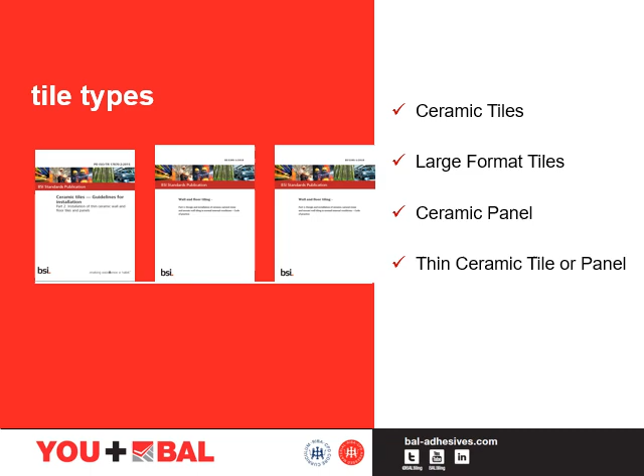The definition of tile types in terms of their dimensions as described on this slide can be found in the British standards. The British Standard 5385 Part 1 2018 Wall and Floor Tiling deals with the design and installation of ceramic, natural stone and mosaic wall tiling in normal internal conditions. Then there's BS 5385 Part 3 2014 Wall and Floor Tiling, which deals with the design and installation of internal and external ceramic and mosaic floor tiling in normal conditions.

In the case of international standards, 2015 saw the introduction of 2 new technical reports. For the installation of large format tiles, we have PD ISO TR 17870-1, and for the installation of thin ceramic wall and floor tiles and panels, we have PD ISO-TR 17870-2.

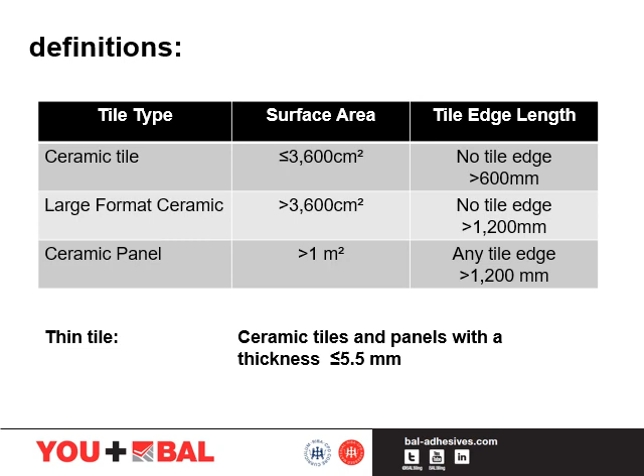The next set of slides looks at some important design considerations when installing larger format tiles and panels on internal and external walls. We will now look at some important background characteristics which should be considered prior to selecting larger format tiles, ceramic panels and thin panels as a suitable wall and floor finish.

We should also select suitable time schedules and procedures to allow those background materials to cure sufficiently so that the majority of shrinkage would have occurred prior to the installation of ceramic tiles or panels. The effect of long-term shrinkage on thin or large format ceramic panels could be a lot more severe than for smaller format ceramic tiles.

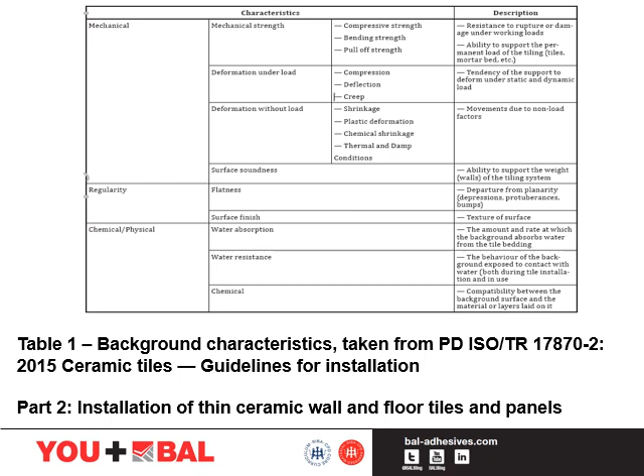However, due to permissible manufacturing tolerances, the large format tiles and panels could have surface flatness irregularities of their own. This makes it difficult for the installer to create a flat tiled finish, and therefore the background may need to be constructed to tighter tolerances to allow for the irregularities in the tile panels themselves.

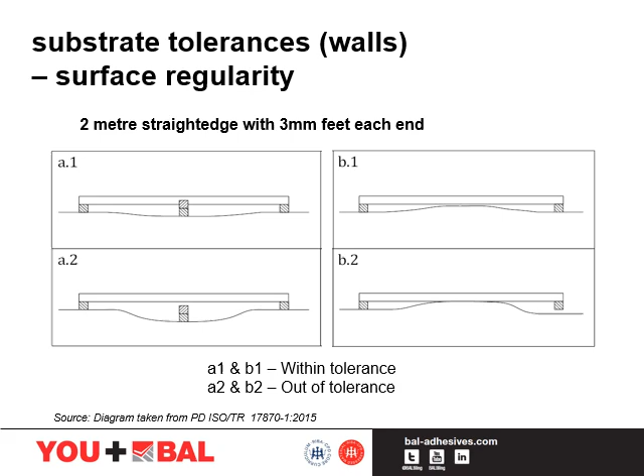As with wall tiling, the British standard for surface regularity on floors is also 3 mm or SR1. Where tiles are bedded in adhesive, the floor should conform to SR1. If the surface regularity of the subfloor is inadequate, it should be corrected prior to tiling work commencing, i.e. we should be using a smoothing compound to create a flat surface to tile to.

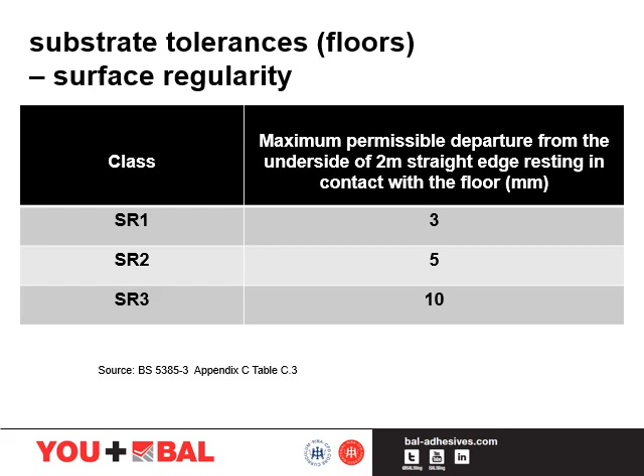Now, the same goes with wall tiling as floor tiling. If we have a large format panel or tile, there may be surface irregularities within the tile itself, so a greater degree of accuracy in the substrate is needed to create a flat finish in the tiles without lipping at the tile joints. Important factors to consider would be the weight of the tile versus the background.

A 10 mm thick natural stone is equivalent to 30 kilos per square metre. A 9 mm thick porcelain tile is equivalent to approximately 18 kilos per square metre. The weight of the adhesive and grout is also estimated at 4 to 5 kilos per square metre for a 3 mm solid bed, and that must be included in the total weight.

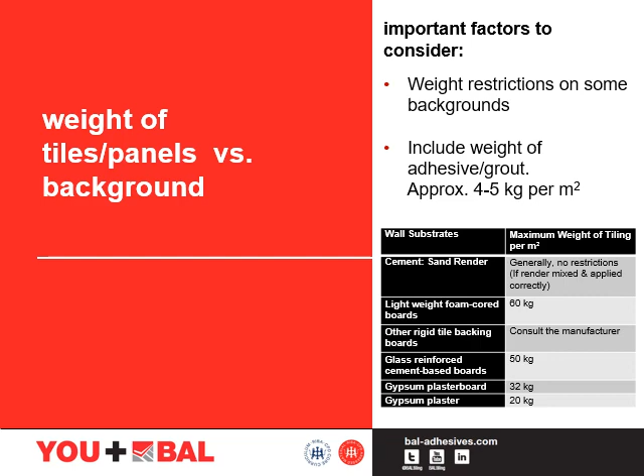Now, as you can see, a 9 mm thick porcelain tile at 18 kilos per square metre plus 4 to 5 kilos of adhesive and grout would be 22 to 23 kilos per square metre, which wouldn't be permissible when tiling to plaster, but you could on every other background. This needs to be considered when specifying.

Sheets and board systems should be mechanically fixed to suitable stud-work, battens and other supporting framework. They should also provide a rigid surface and have minimal deflection under load. The recommendations given in the British Standards state that sheets of boards which are likely to be subjected to movement from changes in moisture content, such as wood-based boards, i.e. plywood, should not be used for direct fixing of wall tiles.

Consideration must be given to taping joints and weak points on the boards themselves, and it might be wise to embed that within tile adhesive. Seek the manufacturer's advice for the recommended installation method and suitability of their board for a particular application, i.e. external tiling or wet rooms.

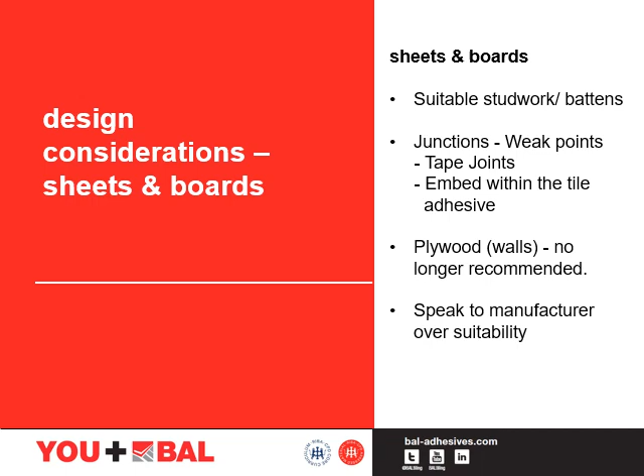The recommended drying time for construction substrates is also an essential element for ensuring the success and longevity of the tile installation. The specific requirements are laid down in BS 5385 parts 1 to 5, the codes of practice for ceramic and natural stone wall and floor tiling.

On this slide we have some examples of new substrate drying times. In the case of sand cement screeds, for example, and render, these times might be reduced if OPC is substituted for rapid dry and low shrinkage cement, or a specialist proprietary pre-mixed screed or render mortar.

Brickwork and blockwork are unlikely to meet the requirements for a surface regularity of SR1 and therefore should require a suitable treatment, i.e. overboarding with a tile backing board or a render.

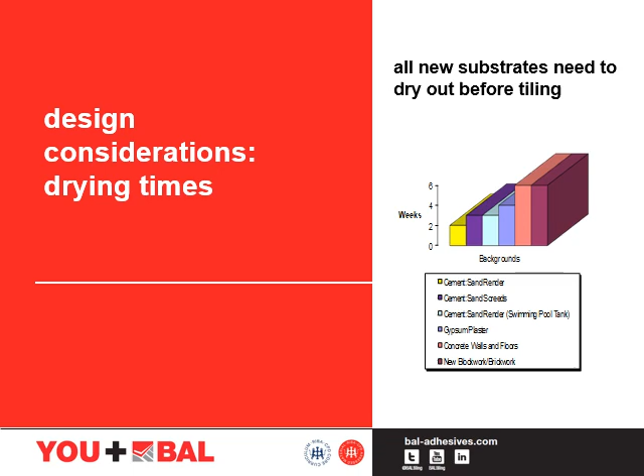As with any tiling installation, the correct preparation of the background is important. The following slides talk in a little more detail about the need for smoothing and levelling compounds in a floor tiling application.

Waterproof protection in wet duty areas, and the effect of thermal change on large format tiles, ceramic and thin panels. Some of these are highlighted in this slide.

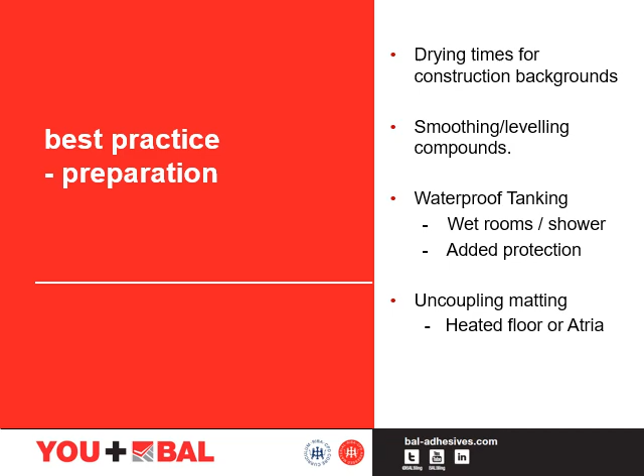The criteria on this slide should be considered at the design stage. When we look at commercial or industrial environments, what other stresses will the tiles be exposed to? Will there be manufacturing chemicals involved? What would be the cleaning process on these tiles?

When we look at dry or wet areas, we need to identify the moisture loading and the quantities of water, along with the time spent where the water is in contact. For water sensitive stone, this can be a key factor.

Traffic and load. Now, what type of static and dynamic loading is to be expected? Will it be foot traffic? Will it be hard rimmed or pneumatic wheel traffic, as well as the foot traffic?

Abrasion resistance. What type of damage is the traffic going to cause? Is that floor subjected to pressure washing? Is there heavy duty, medium duty, or light duty area?

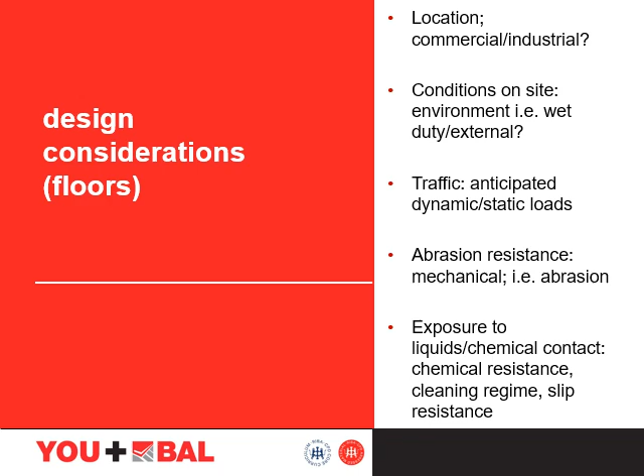Then, exposure to chemicals. What are those cleaning regimes? Is there any chemical usage? What's the hygiene requirements?

As already discussed, smoothing and levelling compounds are becoming more important as trends for the specification of larger format ceramic tiles and panel sizes increases.

A higher degree of surface flatness will assist the tiling contractor in accommodating permissible surface flatness irregularities in larger format or extruded tiles within the adhesive bed. Therefore, it's important for us to remember that the area of flatness tolerance for the tile itself is greater than the fixing standard tolerance.

If we have a heated mesh and cables, we should always be encapsulating those in either a thin layer of smoothing compound or a tile adhesive, as use of a smoothing and levelling compound makes this application process much easier to do and reduces the risk of heating wires becoming damaged.

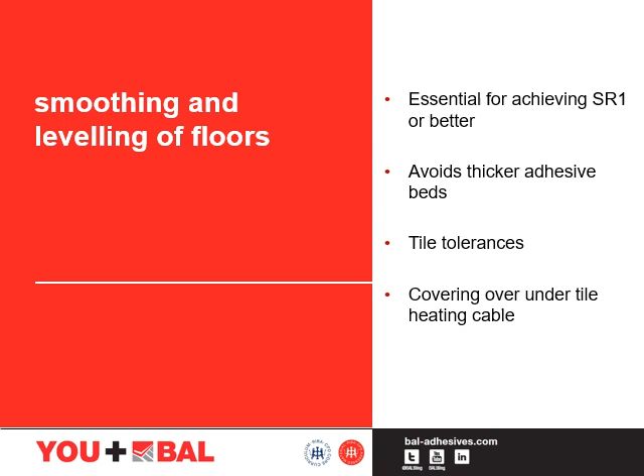There are two main types of liquid applied waterproof tanking membranes compatible for use with ceramic tile installations. We have single part membranes or two component membranes.

The single part membrane is usually an aqueous polymer dispersion based coating, and the two component membrane is normally a cement polymer dispersion based, or based on epoxide polyurethane resins.

Scrim tape and reinforcing tape and matting may be required to reinforce the membrane in areas subject to movement.

So pipe penetrations, drainage outlets and channels, junctions between different bases and backgrounds, internal and external corners of walls, partitions and their junctions with any bases, columns or upstands, and bridging any cracks within the base of the substrate.

Flexible sheet membranes are generally applied using tile adhesives, and the type of waterproof tanking membrane chosen depends on the type of drainage system. We must check suitability with the drainage manufacturer.

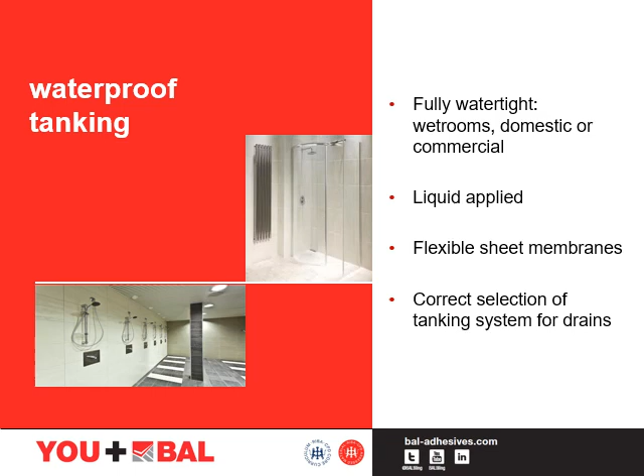The history of the use of an uncoupling system beneath floor tiling dates back to the Roman era, when sand was used as an intermediary layer between the load-bearing substrate and the fixing mortar and tiling layer.

In simple terms, the sand bed created both a supporting layer for the mortar bed and tiles, but also allowed independent lateral movement to occur between this and the structural base layer.

In a similar way, modern uncoupling matting systems are designed to neutralise lateral stresses between the substrate and the tile covering, and thus can protect the tiles from reflective cracking. However, uncoupling mattings are not designed to accommodate vertical deflection or movement.

There are options available for lower profile matting which minimises height build-up, bonded cavity matting systems and floating uncoupling matting, suitable for use in light commercial areas and for use in some problematic load-bearing surfaces.

Uncoupling membranes are recommended particularly for use where underfloor heating or under tile heating is present. The use of uncoupling mattings can be found in both the TTA and the Stone Federation of Great Britain's technical documents for the installation of tiles and natural stone. Reference to uncoupling mattings can also be found in BS 5385 parts 3 and 5.

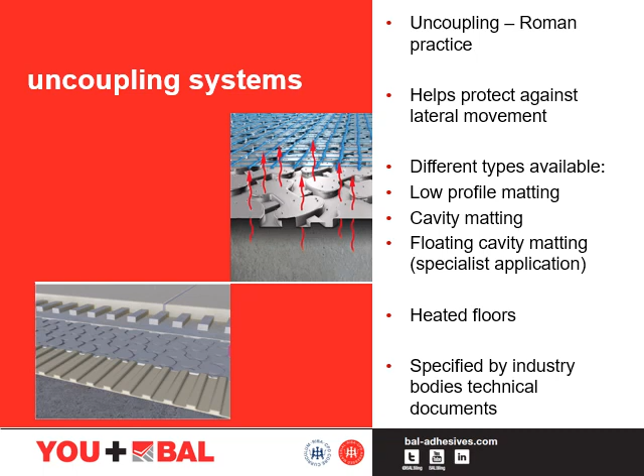Underfloor heating systems should conform and be installed to BS EN 1264-4 2009 water-based surface embedded heating and cooling systems. It should be fully commissioned prior to tiling and also after tiling. This should be done in accordance with the system supplier's manual, whether for warm water or electric cable heating. It's normally 7 days for rapid setting tile adhesive and 14 days for normal setting tile adhesive. There should be no exposed pipework and the surface should be free from cracks and damage.

Uncoupling membranes are recommended for use where underfloor heating is present, and suspended timber floors containing water-fed systems are not suitable for tiling. This is due to the heating pipes precluding the installation of noggins and supports.

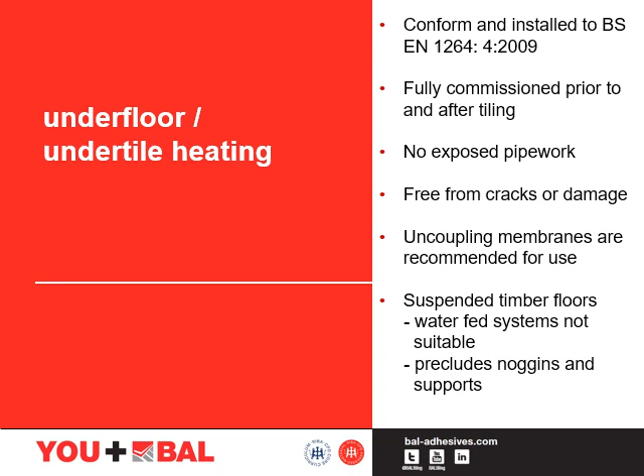Areas subjected to direct sunlight, such as external sunrooms, atria and conservatories, as well as areas subjected to heat sources, i.e. a screed with underfloor heating, are likely to have a variability in the temperature of the background and the tiling layer. In these areas, especially where tiles are dark in colour, a large format tile and panel can heat up and cool down very quickly compared to the background.

For larger format tiles and panels, thermal expansion and contraction is cumulative across the area of the thin panel. An example of a 3 metre long panel over a temperature range of 30 degrees C can expand by approximately 0.65 millimetres along that 3 metre length.

In the next two slides, we compare the coefficient of thermal expansion for different background and tile finishes. Ideally, the coefficient of thermal expansion for the background should not be too dissimilar to that of the tile finish. BS 5385-3 2014 recommends that for internal floors which might be subjected to significant thermal changes, i.e. direct sunlight in an atria or underfloor heating, the floor should be divided up by intermediate movement joints into bays of size no greater than 40 square metres with an edge length no greater than 8 metres.

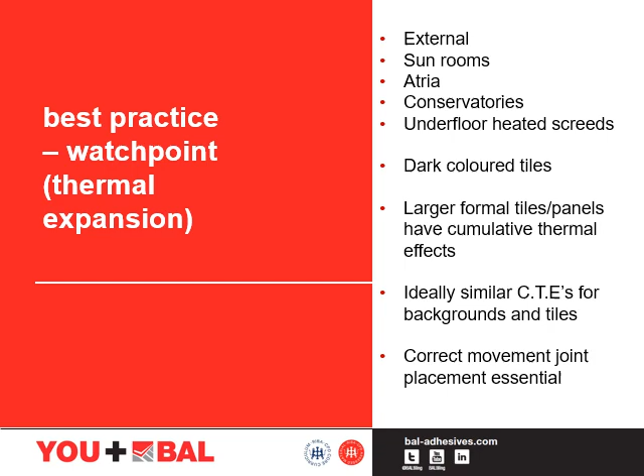We're going to show you a couple of tables demonstrating the different thermal expansion rates of different materials. Table 1 shows the coefficient of thermal expansion for a selection of tiles and stone with heated floors. Using the coefficient of thermal expansion for concrete as a baseline, here are 3 examples of selected rigid floor finishes with varying coefficients. Group BIb porcelain tiles has a medium coefficient. Agglomerate tiles has a very high coefficient which is greater than most bases, and then slate, which has a low to medium coefficient.

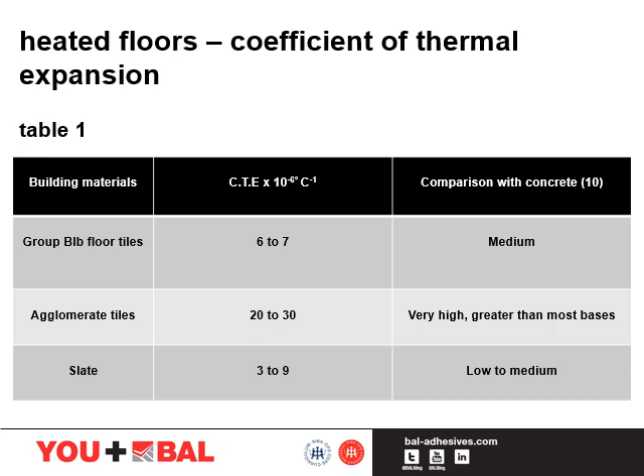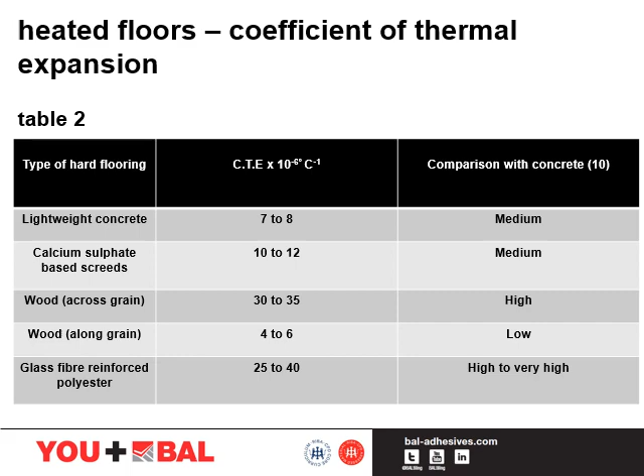Looking at this table of selected common backgrounds and taking into consideration the previous table, it's possible to see that the combination of materials when exposed to thermal effects, i.e. expansion and contraction, can have a direct influence on the overall long-term success of the tiling installation.

Large format tiles and panels will need to be handled with great care. The lifting and cutting process always requires at least 2 people. Transporting and installing these tiles and panels should always be undertaken using a suitable lightweight framework with suction cups, as large panels and thin tiles will be susceptible to breaking if subjected to any bending or twisting force.

Always follow the tile and panel manufacturer's advice for the best way to cut them. It should be ensured that all cut edges are smoothed out using a suitable abrasive disc or diamond pad.

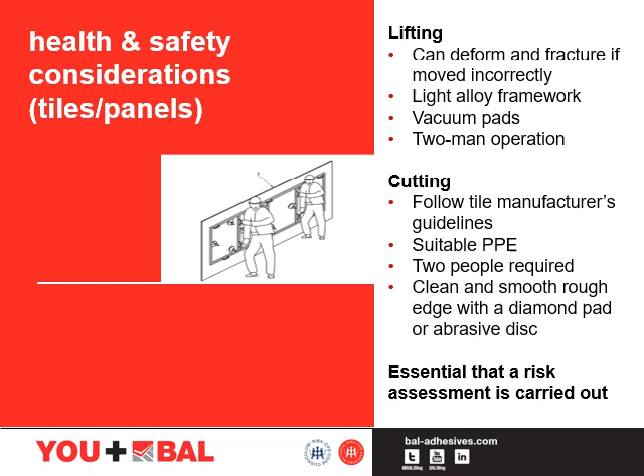Research has shown that the pendulum test is a reliable and accurate way of measuring slip resistance both in dry and wet conditions. For this reason, the HSE have adopted this particular test method. The guidelines relate to the potential risk of slipping occurring on a floor corresponding to the pendulum test values. In general terms, the slip potential is classed as 0 to 24, high slip potential, 25 to 35, medium slip potential, and 36 plus, low slip potential.

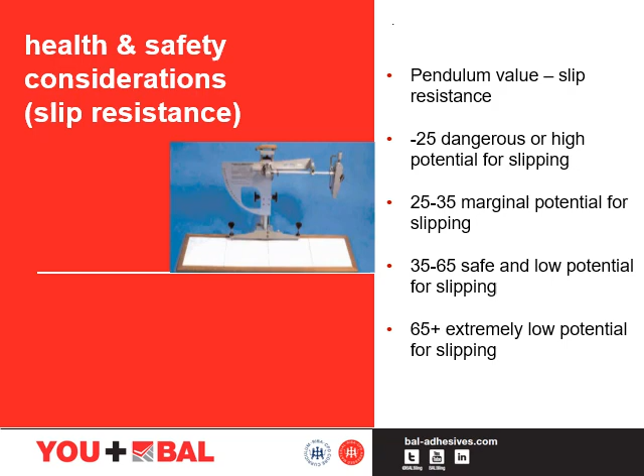BS 5385-1 2018 and BS 5385-2 2015 advise that where tiles have a greater than 0.1 metre squared face area and are required to be fixed above 3 metres floor level, they should be secured by mechanical fixings. Where tiles are to be mechanically fixed, the background should be sufficiently robust to take the method of attachment.

Tiles used for wall tiling externally must be porcelain. An AIa tile, which is extruded, has to have a water absorption of less than 0.5%, and BIa, which is dust pressed, must also have a water absorption of less than 0.5%.

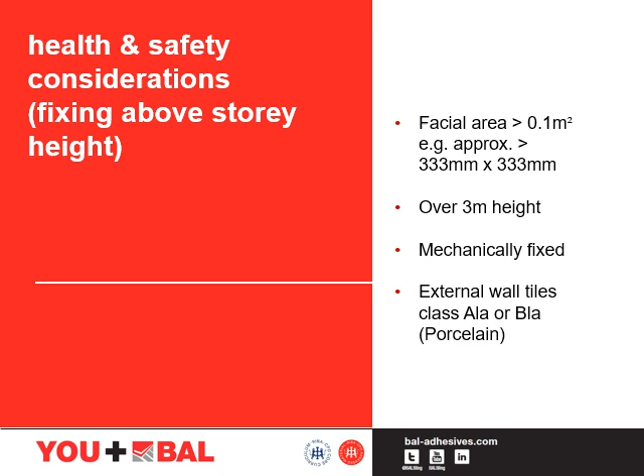This section looks at how the correct selection and specification of materials can help the process for fixing large format tiles. As with any installation, it relies on identifying all of the key elements of the installation to achieve a successful outcome. The application: what is the application in which a ceramic tile or panel is to be fixed?

Floor tiling installation should be carried out within a 3 to 6mm solid bed of adhesive, ensuring that as far as possible voids are eliminated beneath the tiles. For floors, any voids within the tile adhesive will be potential points of weakness under load, thus increasing the risk of impact damage. Taking into account substrates and preparation, consideration must be given to selecting the right

type of substrate that is capable of receiving a rigid tile or panel finish. We can't have any vertical deflection, for example. Correct preparation is key to the success of any tiling installation.

Is the substrate flat enough to allow the installer to achieve a flat tiled finish with no lipping of the tile joints? If not, we must consider specifying a smoothing compound.

Looking at tile type, first and foremost we need to look at safety in use. This should take into account the floor tile slip resistance both in dry and wet conditions, the solidity of the tile finish, are the tiles fully bedded in the correct tile adhesive, and then the maintenance, as this can impact on the long-term slip resistance.

The tile type, size and thickness is important and will influence the correct choice of tile adhesive and grout. So the selection of the right materials, the fixings, adhesives and grouts, incorporating new technologies, is paramount in ensuring the success and longevity of any tiled installation.

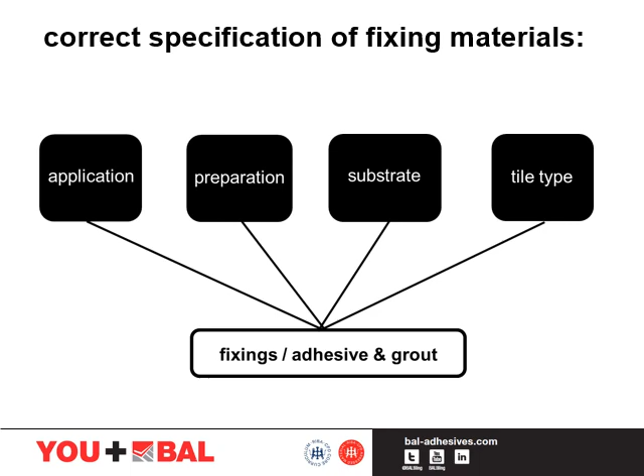The selection of tile adhesives and grouts. Tile adhesive classification and standards: we have three categories of tile adhesives - cement-based, dispersion and reaction resin.

Cement-based normally comes in a bag of powder and is mixed up on site. Dispersion comes in a tub which is water-based and ready mixed, ready for use. A reaction resin is normally a 2 or 3 part product with a resin and a hardener.

Moving on to the classifications, we have 1, which is a normal adhesive, and 2, which is an improved adhesive. This meets the requirements for additional characteristics. Then we have a lettered system.

F is a fast setting adhesive, normally cementitious only, and that achieves 0.5 newtons per millimetre squared within 6 hours. T, which is reduced slip, is normally used on walls. Then E, which is an extended open time, over 30 minutes - this is for cementitious and dispersion adhesives only.

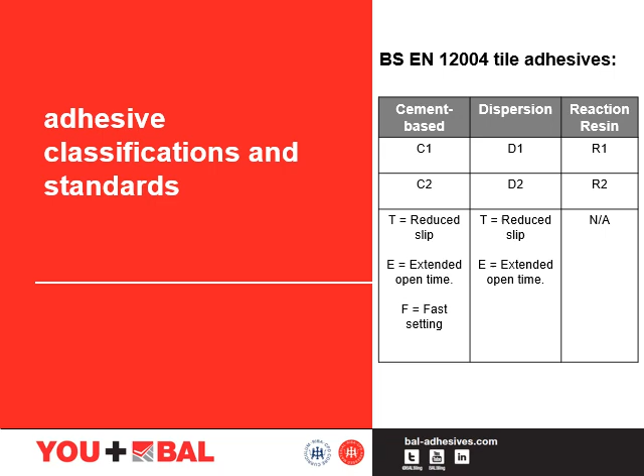The first three are not tested for in accordance with the EN 12004 requirements, but are important to the end user and assist in providing an adhesive which is easy to mix and apply with a good working time. This allows for adjustment of pre-bonded tiles within a given time.

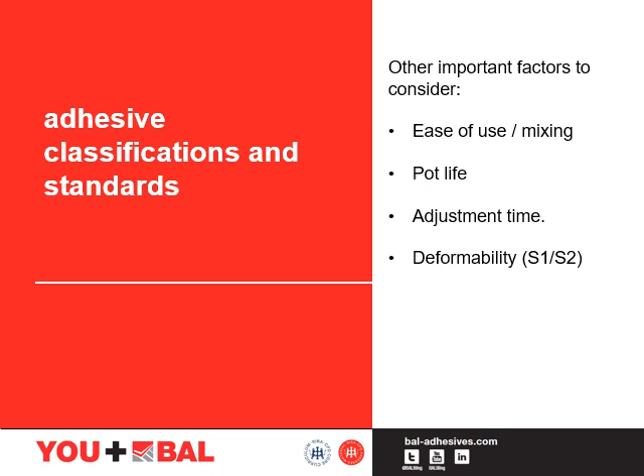Solid bed fixing is vital for all tiling, including fixing large format ceramic tiles and panels. The tile adhesive should be applied to the substrate and the back of the tile using a suitable notched trowel. We should not, under any circumstances, allow any sort of spot fixing of tiles.

This creates voids within the tile adhesive and could cause problems further on down the line. It may be wise to specify a pourable product for floor tiling.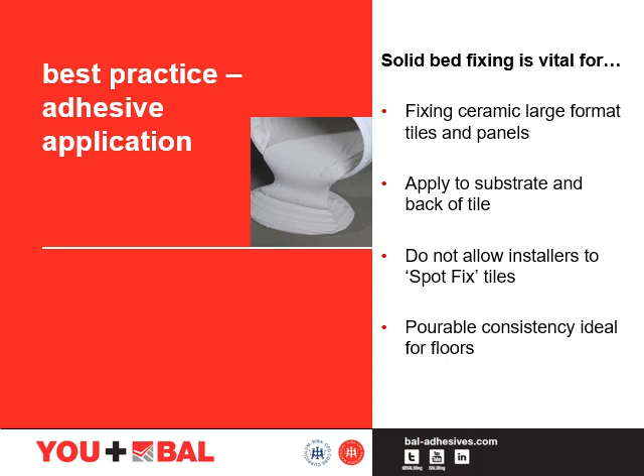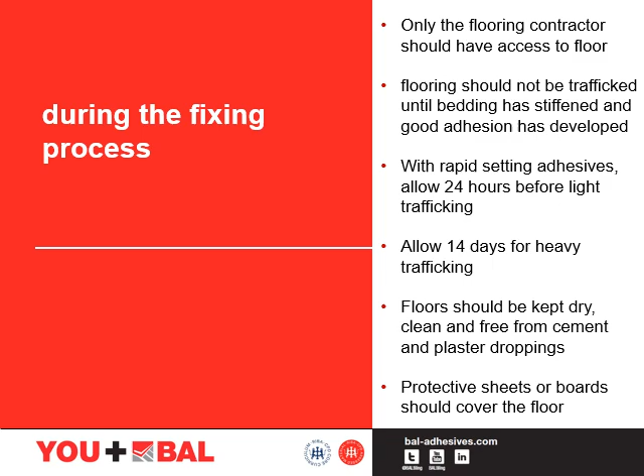This slide shows a few watch points during the fixing process. Flooring should not be trafficked until the bedding has stiffened enough for good adhesion to develop. We should allow 24 hours for rapid-set adhesive before light traffic, 14 days for heavy traffic. The floor should be kept dry, clean and free from cement and plaster droppings. Maybe use protective sheets or boards to cover the floor without retaining moisture.

Grout classifications and standards: in this section we have cementitious and reaction resin grouts. Cementitious is normally a bag of powder, and reaction resin is normally a 2 or 3 part product which you mix together - either a resin and hardener with colour, or a resin with hardener and colour mixed together. The cementitious grout has 2 categories: 1, a basic grout, and 2, an improved or polymer-modified grout. The lettering system gives us W on the cementitious side, which is reduced water absorption, and A, which is high abrasion resistance.

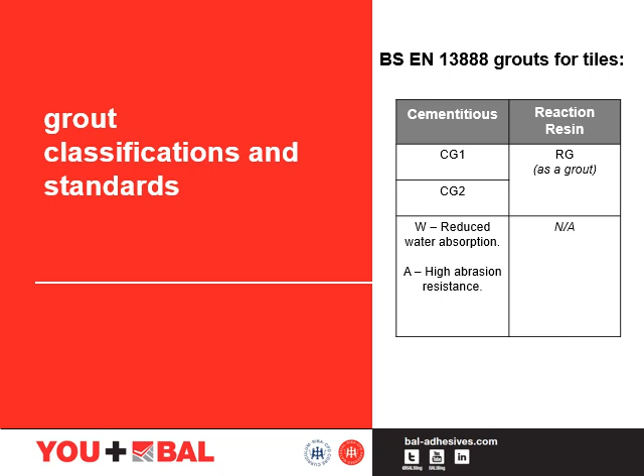The main difference between a cementitious grout and a reaction resin grout is that reaction resin grouts are more often waterproof. The minimum joint width for grouts will vary depending on the facial area of the tile. The minimum joint width is required to allow for the relief of any localized movement stresses.

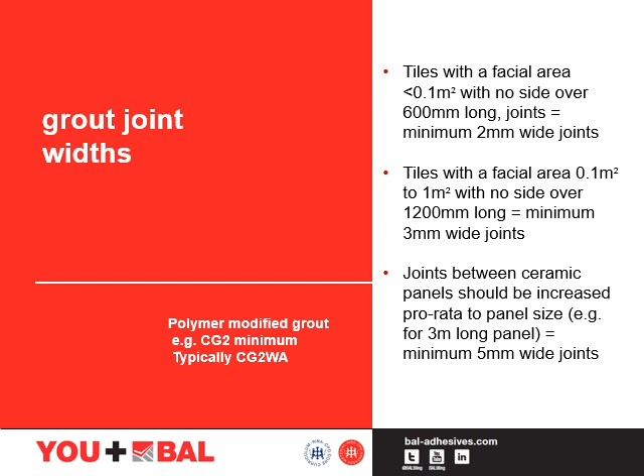When solidly bedding thin tiles and panels into the adhesive bedding, much of that shallow joint between the thin tiles and panels could become partially filled with residual adhesive. As far as is practicable, this should be removed from the joints in order to provide adequate joint depth and volume to receive the tile grout. Failure to do so could result in unsightly grout and reduced grouting performance.

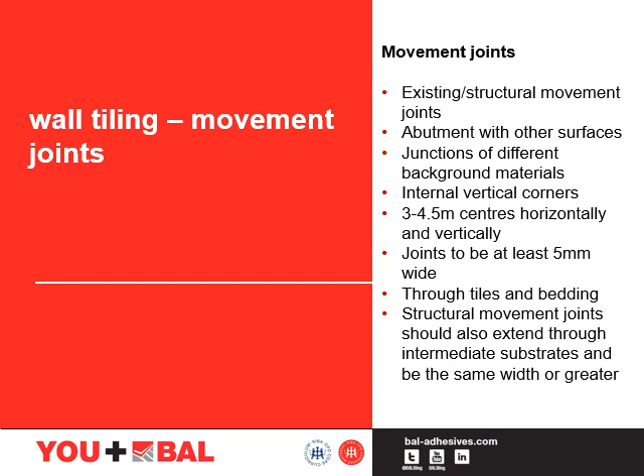This slide shows the different areas where we should allow for movement joints in wall tiling. The joints should be at least 5mm wide, they should go through the tiles and bedding, and they should also incorporate an elastic compound such as a suitable sealant. It's worth noting that if we're using a natural stone product, we should be specifying a neutral curing sealant. As with wall tiling, we should be incorporating movement joints into our floor tiling.

Those movement joints should be incorporated around the perimeter, and where tiling abuts columns, curbs and steps, for example. We should allow them at doorways and thresholds, and those tiles should be divided into bay sizes no greater than 10 meters by 10 meters. In heated environments, the maximum bay size should be no bigger than 40 square meters, with an edge length not greater than 8 meters. On suspended floors, the bay sizes should be reduced and additional joints provided over supporting walls or beams.

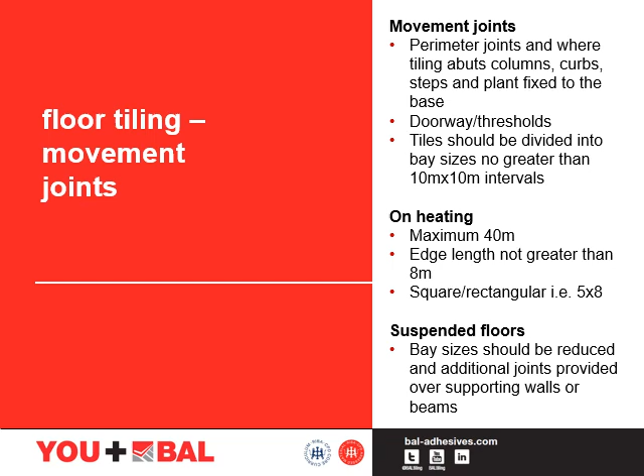So within this presentation, you will have gained an understanding of these aspects related to the installation of large format tiles.

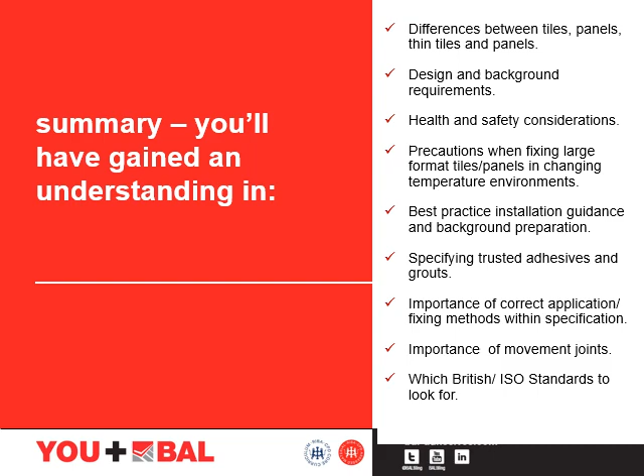I'd now like to take you through a couple of case studies. The 2-year refurbishment of the centre included revamping shopfronts, installing new energy-efficient LED lighting systems and the installation of granite flooring throughout. The installation of water-sensitive granite in the 2-storey centre required a comprehensive specification including rapid drying white adhesives, quick drying grouts, primers and levellers.

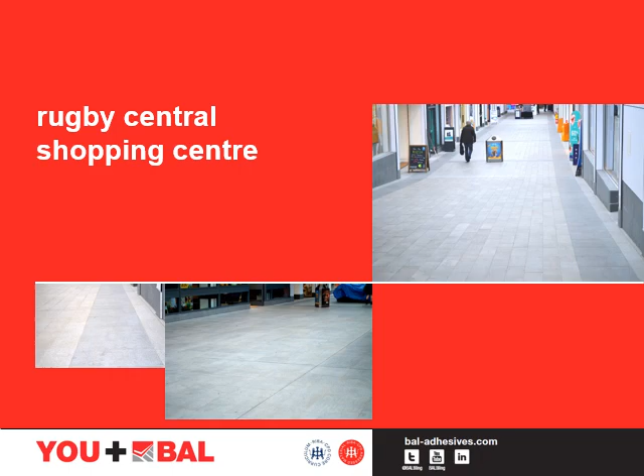Specialist product selection was key to use across the range of different tile types and to ensure ease of installation and the highest quality results of aesthetics to last a lifetime.